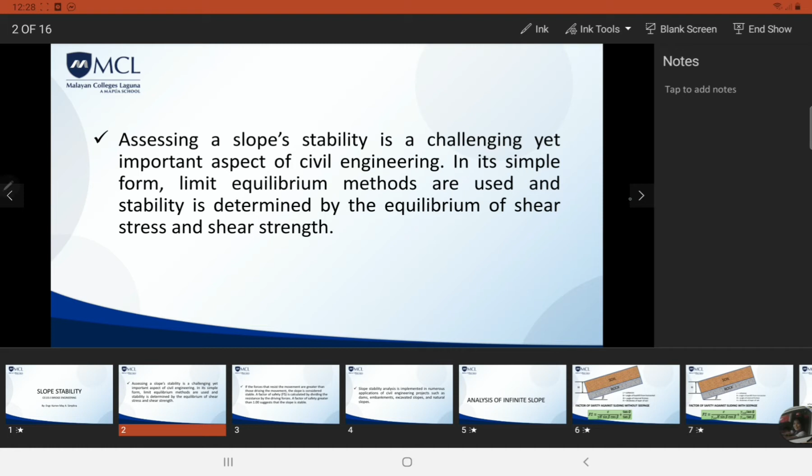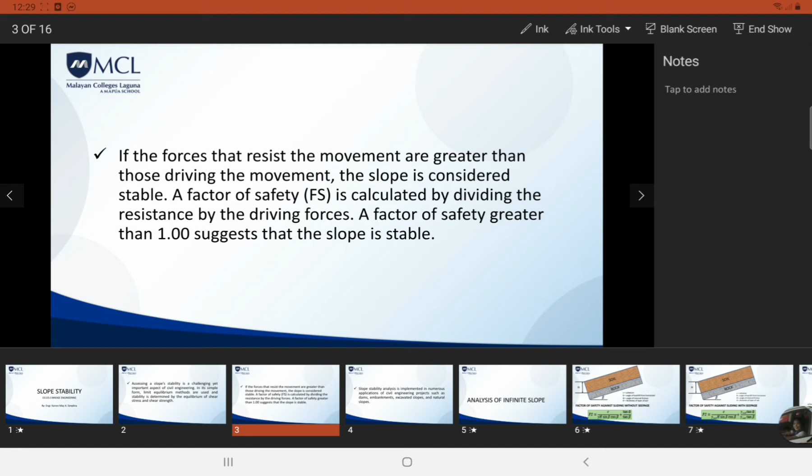Diba? And what causes the resistance ng soil when it comes to slope stability? Dalawa siya, it can be frictional force and then it can be cohesive force. Nakaka-resist siya ng driving forces. Mamaya, mas matututunan nyo siya as we compute.

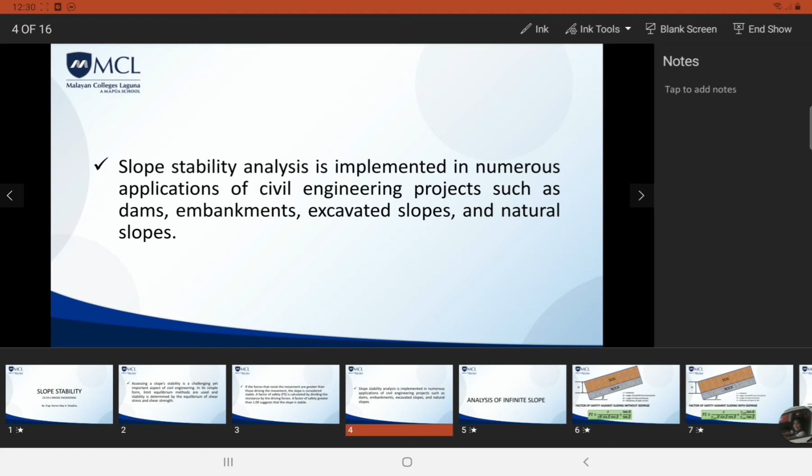Slope stability analysis is implemented in numerous applications of civil engineering projects like dams, embankments, excavated slopes, and natural slopes. Alam naman natin, pag mga dams, embankments, excavated slopes, there is sloping soil structure. So pagka sloping yung soil, of course, there are possibilities, pwedeng magkaroon ng erosion, pwedeng magkaroon ng madaming disturbances o possible na maging factors para masira siya. So dapat nadi-design din natin yung slope stability. Doon papasok yung importance ng topic na to.

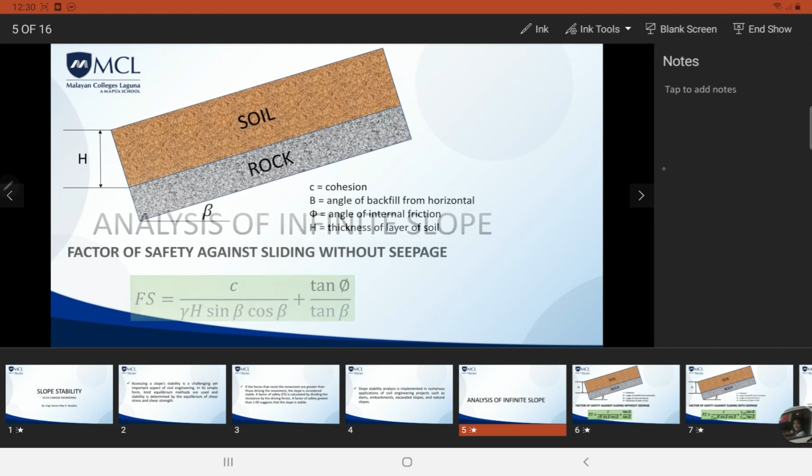Okay, ayan. Let's start with the analysis of infinite slope. I am going to introduce 2 categories now. One is kapag without seepage, meaning walang nagpo-flow na pore water. And then the second one is, of course, with seepage.

Unahin natin, without seepage, this will be your formula. We simply consider the factor of safety equal to the cohesion all over gamma of the soil times the height, sa figure naman, times sine beta, cosine beta, plus tangent phi being the angle of internal friction, over tangent beta. Beta being the angle of backfill from horizontal. Ayan, H is the thickness of the layer of the soil, vertical distance.

Let's consider naman pag may seepage, may pore water. Ang pagkakaiba lang nila ni without seepage is imumultiply mo lang ng gamma saturated yung first term, o imumultiply mo lang yung denominator ng first term ng gamma saturated, and then sa second term, imumultiply mo lang ng gamma submerged over gamma saturated. Gamma submerged is the gamma saturated ng soil minus gamma ng water. Later on, we will compute, makikita nyo naman kung paano kino-compute yung gamma saturated, gamma submerged. I believe, naturo naman na sa inyo yan.

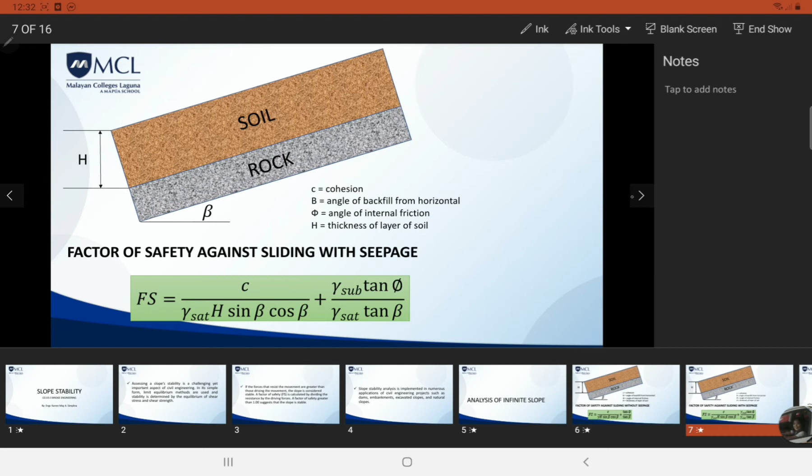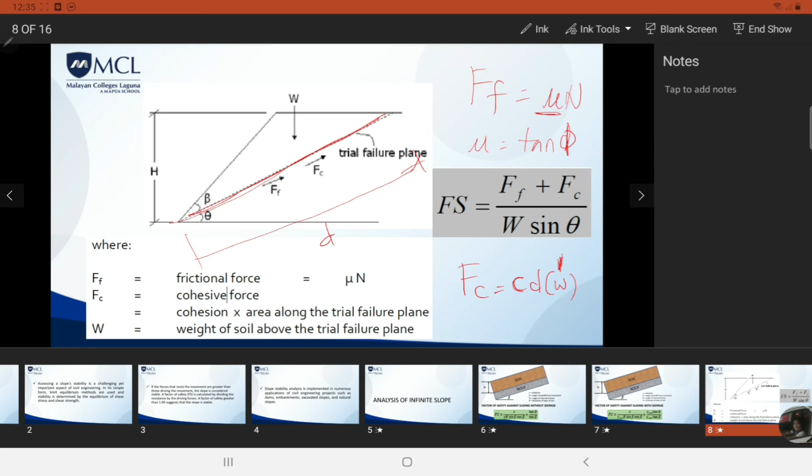That's it. Let's proceed to the solving proper.

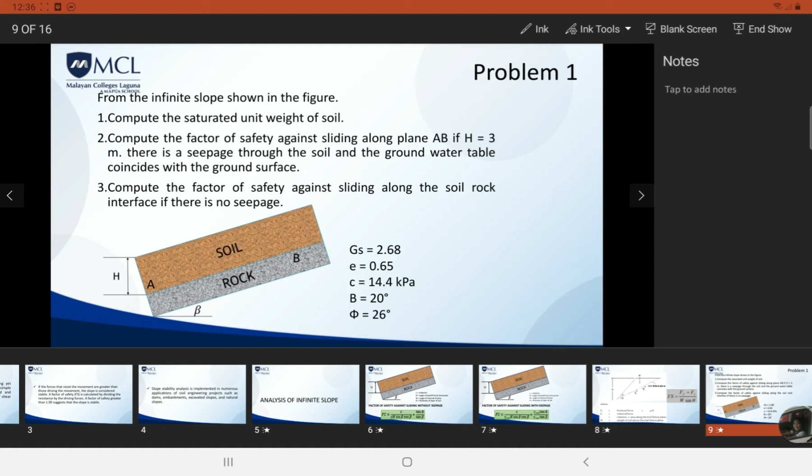So what's being asked: what is the saturated unit weight of soil? Factor of safety against sliding if there is seepage, and factor of safety against sliding if there's no seepage. Let's answer number 1.

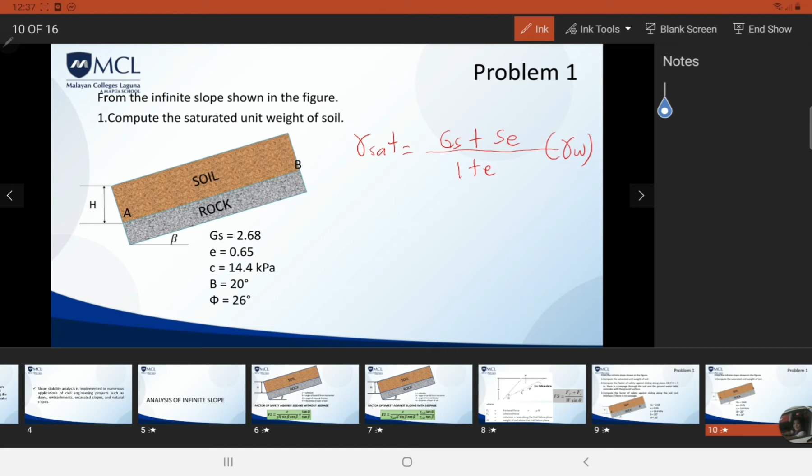We know that when we solve for the saturated unit weight, we simply use the general formula: specific gravity plus SE over 1 plus E, times gamma water, wherein when saturated, S is 1.

Let's substitute all the given values: we have 2.68 plus 1, then E over 1 plus E, then gamma of water we use 9.81. Therefore the saturated unit weight is 2.68 plus 0.65 over 1.65 times 9.81, so we get 19.7984 kilonewtons per cubic meter. That's your answer for number 1.

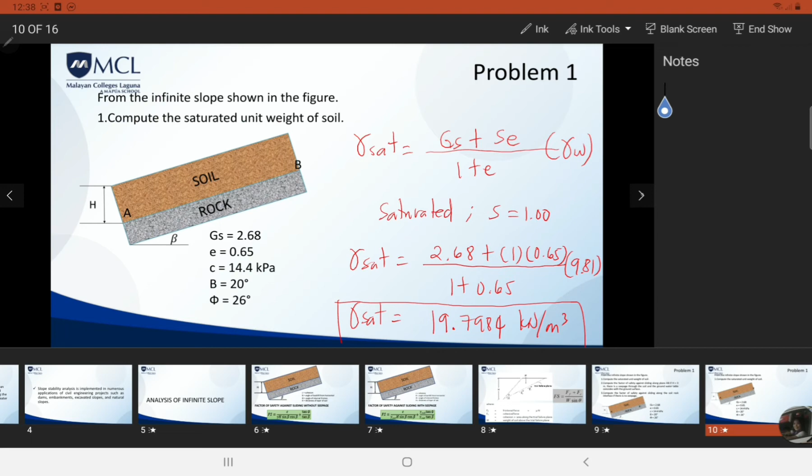Next item: compute the factor of safety against sliding along the plane AB if H is equal to 3 meters, and there is seepage through the soil and the groundwater table coincides with the ground surface. So this is the water table. Meaning our soil is saturated, so there is seepage. Therefore what formula do we use for factor of safety?

We use C over H gamma sat, sine beta cosine beta, then gamma sub, tangent phi over gamma sat tangent beta.

Let's solve for gamma submerged. What is the formula for gamma submerged? That is gamma saturated minus gamma water. We have gamma saturated from our previous problem, 19.7984, minus 9.81. So what is our gamma submerged? 19.7984 minus 9.81, so we got 9.9884 kilonewtons per cubic meter.

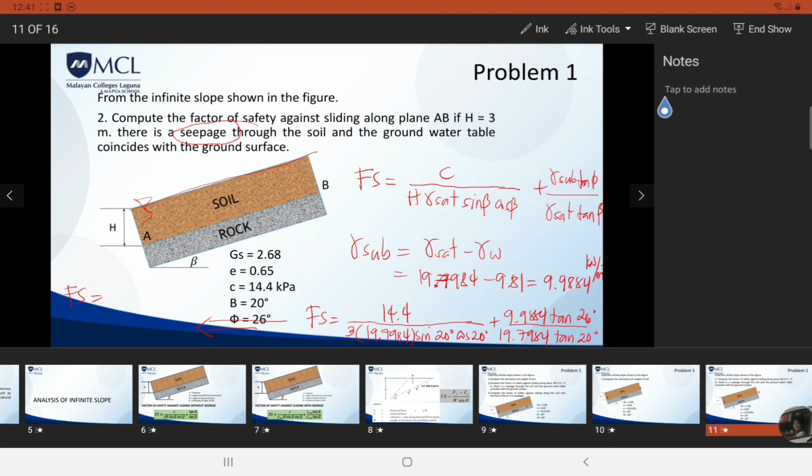I'll just put this here since we don't have space. So it's the answer: 14.4 over 3, 19.7984, sine 20, cosine 20, 9.9884, tangent phi over 19.7984, tangent 20. So we got 1.4304.

So how can we describe the stability of our slope? Is it stable? Definitely stable, because this is greater than 1. We said the ideal factor of safety should be greater than 1, so the structure is stable.

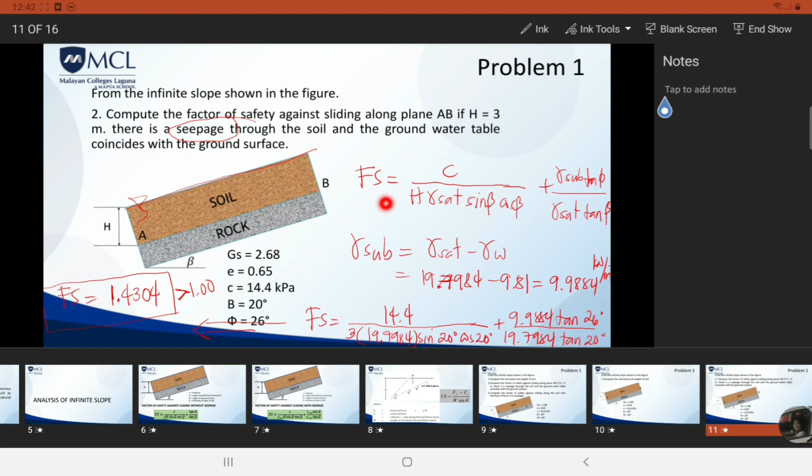Next, for the factor of safety without seepage, what is the formula? That is C over H gamma, sine beta cosine beta, plus tangent phi over tangent beta. So we simply substitute.

We have 14.4 over 3, gamma of the soil 19.7984, sine beta cosine beta, then tangent phi over tangent beta. So what is FS? 14.4 over 3, 19.7984, sine 20, cosine 20, then tangent 26 over tangent 20. So the answer is 2.0944.

What can you say about the stability? It's far more stable than the one with seepage. Right? Okay, what could be the factor? What do you think is the factor?

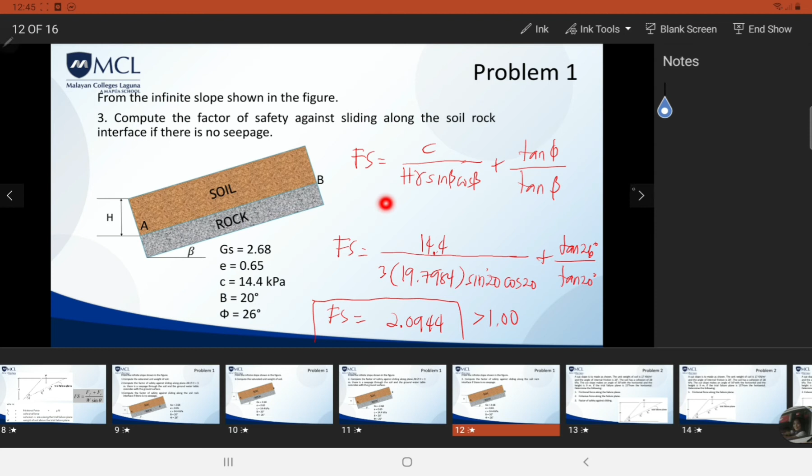So we have problem number 2. This one has a trial failure plane, so the way of solving the factor of safety is different compared to the first problem. A cut slope is to be made as shown. The unit weight of soil is 17 kN per cubic meter and the angle of internal friction, phi, is 20 degrees. The soil has a cohesion of 28 kilopascals. The cut slope makes an angle of 30 degrees with the horizontal—that's your cut slope from the horizontal—and the trial failure plane is 15 degrees from the horizontal.

Determine the following: first, frictional force along the failure plane; second, cohesive force along the failure plane; third, factor of safety against sliding. So first, let's find the frictional force along the failure plane.

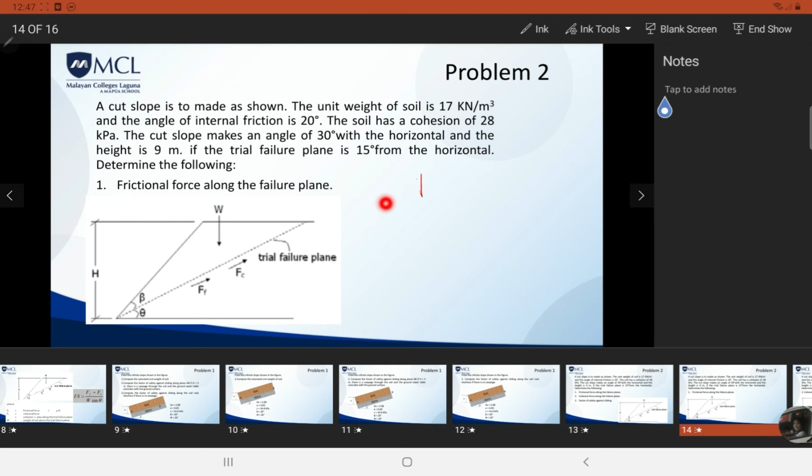How do we compute for the frictional force? That is simply mu times n. And how do we solve for mu? Mu is simply tangent phi. What is the value of phi? Phi is 20 degrees. Therefore, mu is 0.364.

0.364. Now let's solve for n. Where is n in the figure? N is the normal force with respect to the failure plane. So if this is your failure plane, the perpendicular or normal force there is this one.

Perpendicular to the surface. Now since we have the weight, it has a component vertical or perpendicular to the failure plane, and it also has a component parallel to the failure plane. So if I make a cross here, will you agree that if this is theta, this is also theta?

There, so this is 6 meters. Okay, so the value of A is 6 meters. So we can now proceed, guys. Let me continue this.

So we have here 17, which is gamma. 1/2 times 6 times 3. Right? 1/2 times 6 times 3. Then width is 1 meter. Okay, so what is the value of the weight?

Okay, so 17 times 9. So we have 153 kilonewtons. And we solve for N.

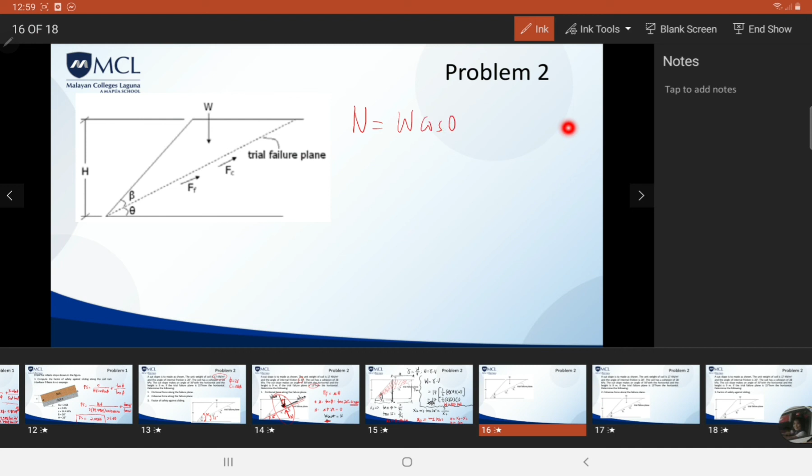N is equal to W cosine theta. So we have W, 153. Then we have the angle theta, which is 15 degrees. So what is the normal force? W cosine 15. Okay, so we have here 147.7867.

Notice, guys, that I always consider up to 4 decimal places. I expect that you too, when I give a quiz or an exam, make it - don't write the whole decimal part. 4 decimal places will do. Okay? So 147.7867 kilonewton. And then, of course, we have the frictional force now, which is mu.

What is mu? 0.364. Remember that? We computed it from here. 0.364. Okay, times N. So the frictional force finally is 0.364 times 147.7867. So we have 53.7942 kilonewton.

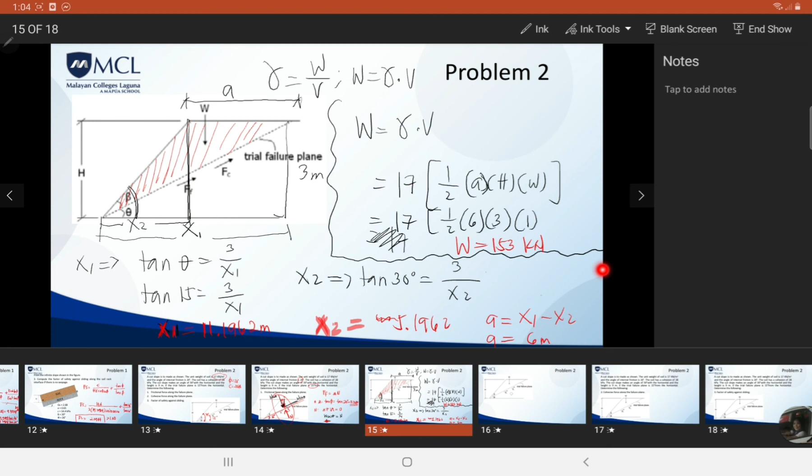Then what is the frictional force? Okay, frictional force we have 53.7942, over W. What is W? W is 153. Okay, 153 sine theta. So what is the factor of safety? 324.5508 plus 53.7942, all over 153 sine 15. So we got 9.5543.